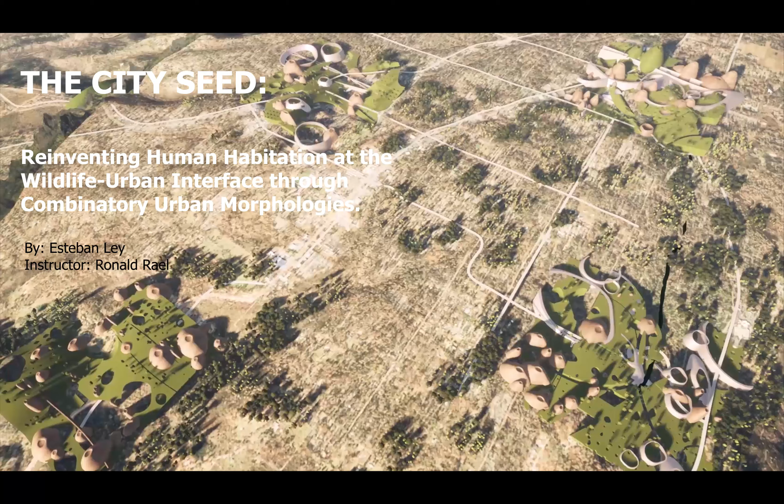The City Seed: Reinventing Human Habitation at the Wildlife-Urban Interface through Combinatory Urban Morphologies. A project by Esteban Ley under the instruction of Ronald Rael.

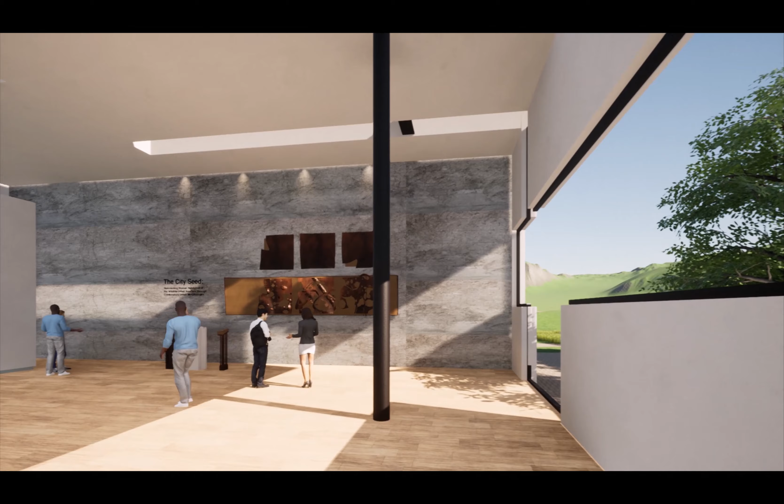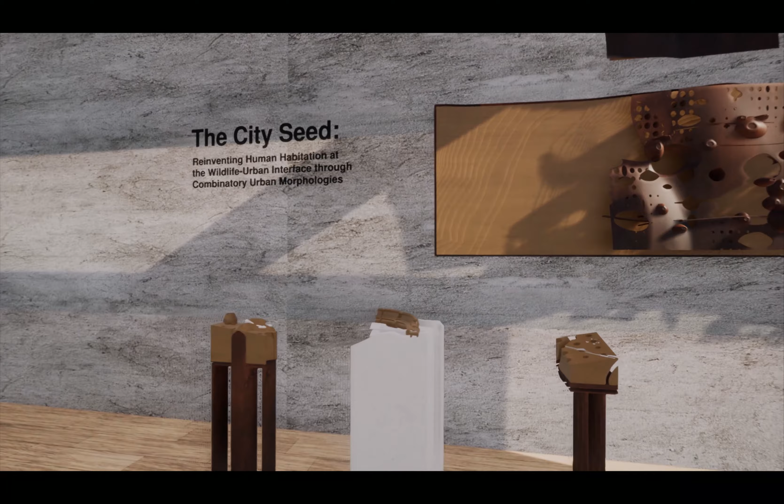The City Seed project is a speculative proposal for the redevelopment of Paradise, California, and the envisioning of a new paradigm for human habitation at the wildland-urban interface. The project's premise is to establish economic and fire resiliency in Paradise, to provide fire-resistant shelter post-fire disaster, and to dramatically re-envision urban morphology and materiality.

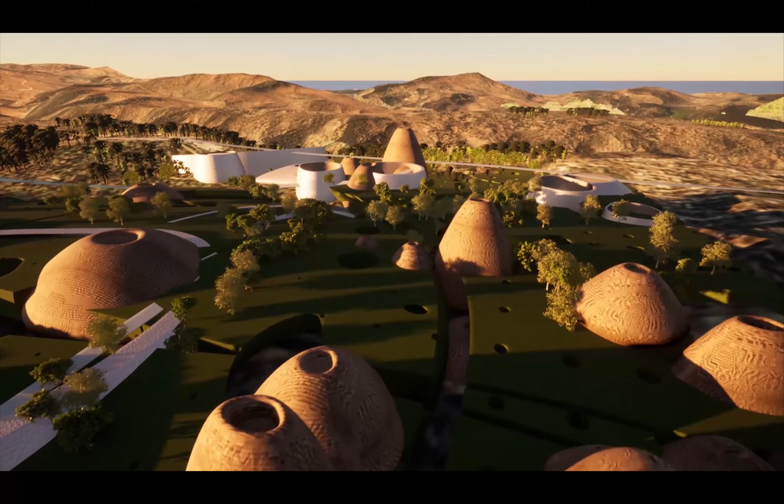With the threat of fire disaster growing year by year in Northern California, it is critical that fire-resistant materials and urban planning be utilized to minimize the burning of our built environment and to build stronger, more resilient communities.

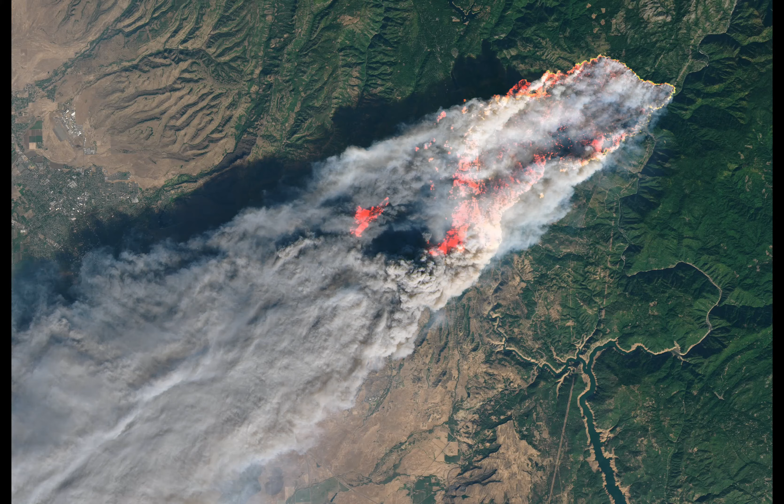In 2018, Paradise was struck by the Camp Fire, one of the deadliest forest fires in California history, which led to a tremendous loss of life. Thousands of homes and commercial structures were destroyed due to the fire, leading to a huge exodus from Paradise in the aftermath.

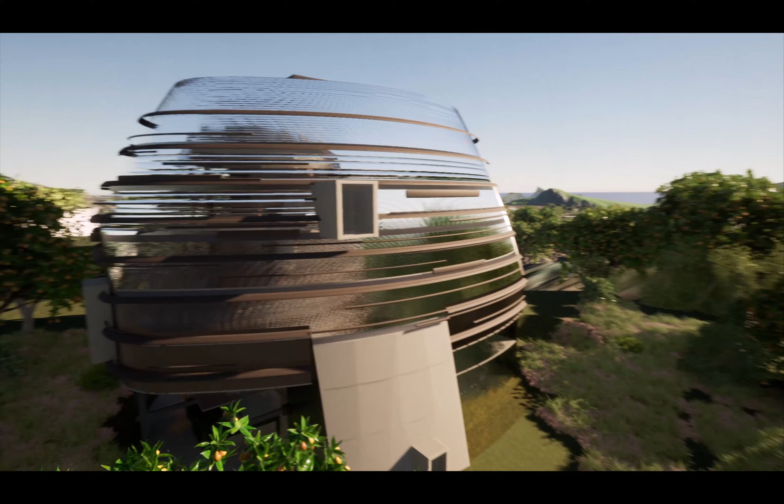The City Seed project includes the design of several buildings situated in a new master plan for Paradise. The plan will phase in the construction of 4 multi-use communities, which will provide Paradise with fire-resistant homes and public structures.

The central concept of the City Seed project is taken from the heart of the problem of wildfires, and from the beginning of any forest, the seed. As if planting the seed for the growth of a new forest city, this project looks into the future of how new homes and shelter can be constructed with fire-resistant materials and fire preventative planning strategies.

The city uses 3D printed earthen construction, terraforming, and troglodyte subterranean dwellings as a code or DNA for future growth. This city will use the refuse of the 2018 Camp Fire as a resource for new construction. The planning of a series of tree farms and managed natural forests in adjacent areas of the burnt city will provide future building materials and could one day become a future site for earthen construction.

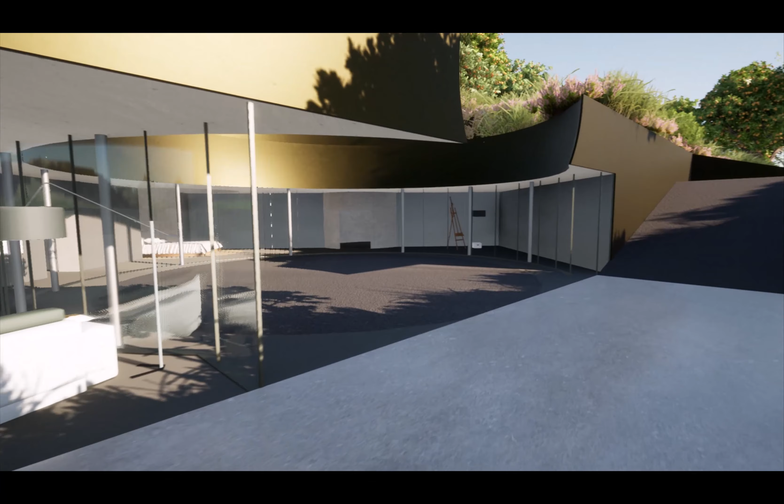Increased density of residential, commercial, civic, and recreational functions minimizes the amount of dispersed rural dwellings, which often contribute to bad forest ecology and risk of fire damage.

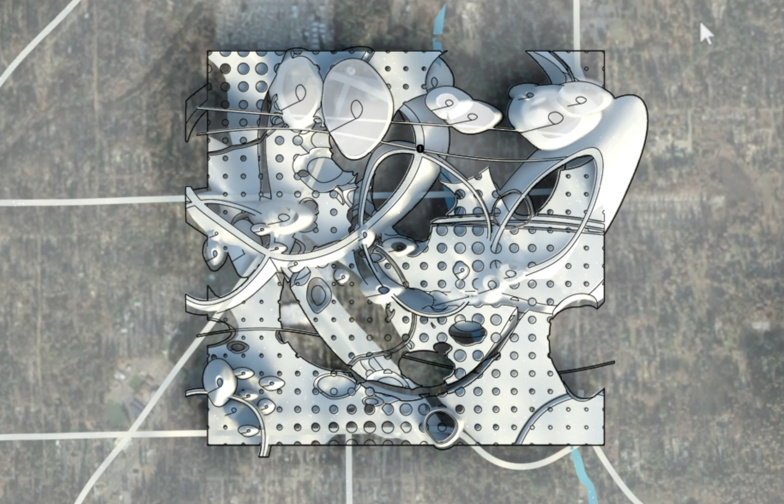While the City Seed project is primarily new construction, a complex palimpsest of new and old is produced by preserving major road networks and large portions of central Paradise.

The primary fire-resistant measures of the city lie in its excavation of earth and subterranean spaces. The primary residential component of the project is its grid of homes dispersed across the site in the form of subterranean courtyard dwellings. Their central courtyards act as a central circulation space and give residents the ability to take shelter under the earth in case of fire.

As another key fire-resistant measure, the combinatory form provides space for new water reservoirs, which have a dual function as park amenities and as water storage for use in putting out fires.

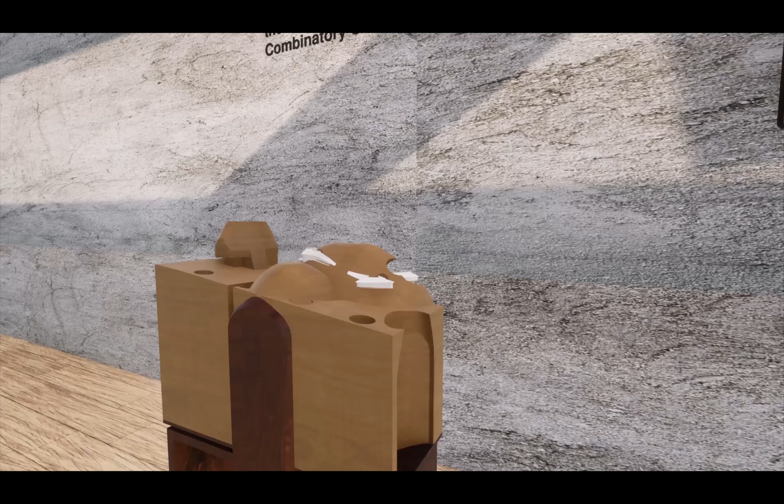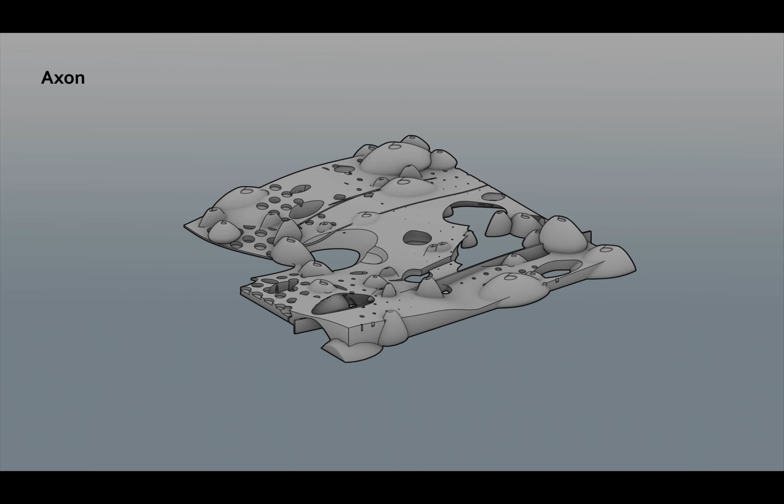The project's combinatory formal strategy is explored through various architectural models at several scales and produces a multiplicity of microclimates and spatial conditions throughout the city. In the generation of these forms, a complex aggregation of various prototypes is achieved through parametric randomization of rotation, scale, and frequency. A rich underlying system is produced by the Boolean relationship between these objects to each other and to the origin surface or field condition.

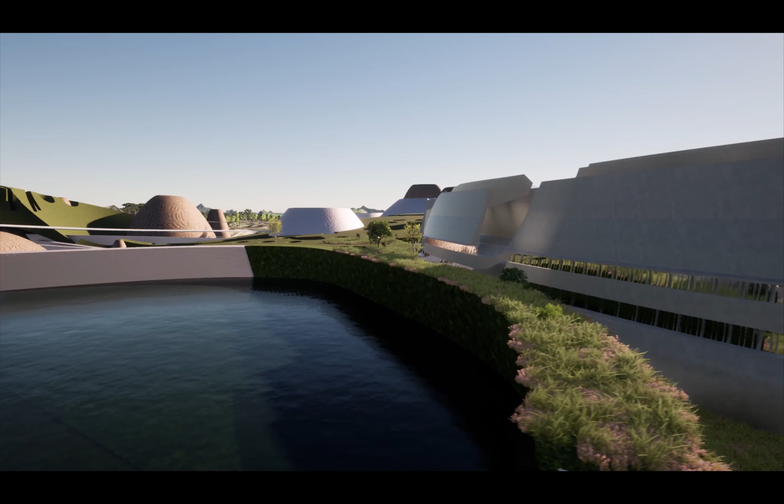The introduction of a variety of formal prototypes also allows for the negotiation and incorporation of water reservoirs, public recreation spaces, and tree farms into the urban landscape. The project critically reconsiders the ground plane as a hybrid of synthetic and natural landscapes.

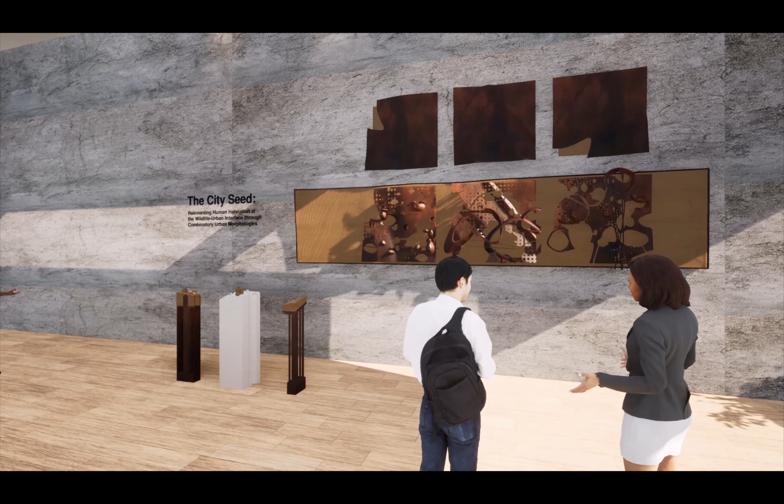The courtyard prototype is the primary residential component of the development. The network of single-family homes creates an interconnected field across the site. Each home benefits from passive heating and cooling thanks to the temperature of the earth.

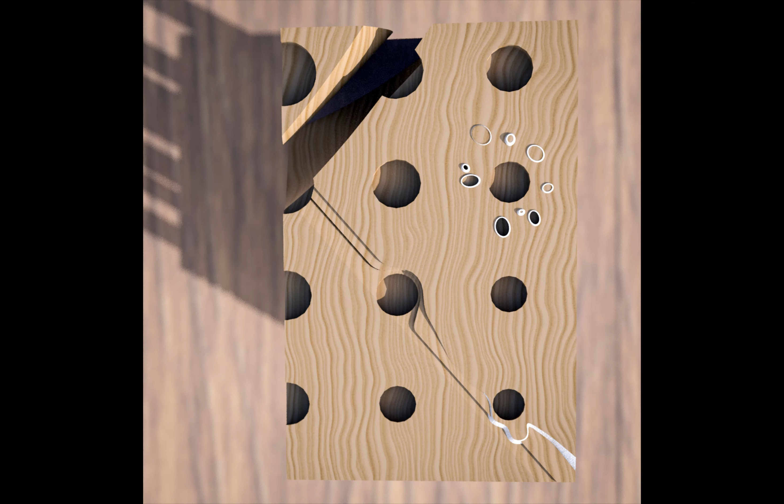Terracing and circulation down to the courtyard home maximizes southern exposure and increases availability to natural light. Each home is radially planned around a central garden and courtyard. The spaces deeper in the earth act as shelters from fire and receive natural light from skylights.

These subterranean spaces would be constructed with 3D printed earth, concrete, and small diameter timber framing. The excavated earth gathered from each home would be saved as a resource for constructing other buildings on the site.

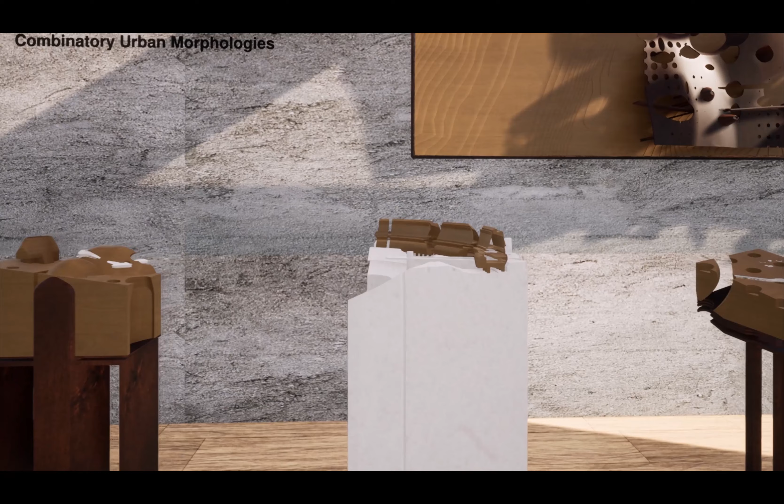The final prototype explored by this project is the ring prototype, which can be seen across the site at the location of several water reservoirs. Water is contained by this massive outer concrete ring.

Some of these small lakes will be available for public use as amenities and parks, while others will be reserved for firefighting purposes. The ring typology seen in this physical model shows how these forms can be segmented and constructed as buildings. These extruded building forms function as educational or medical facilities and are connected to other commercial and residential areas through public metro systems.

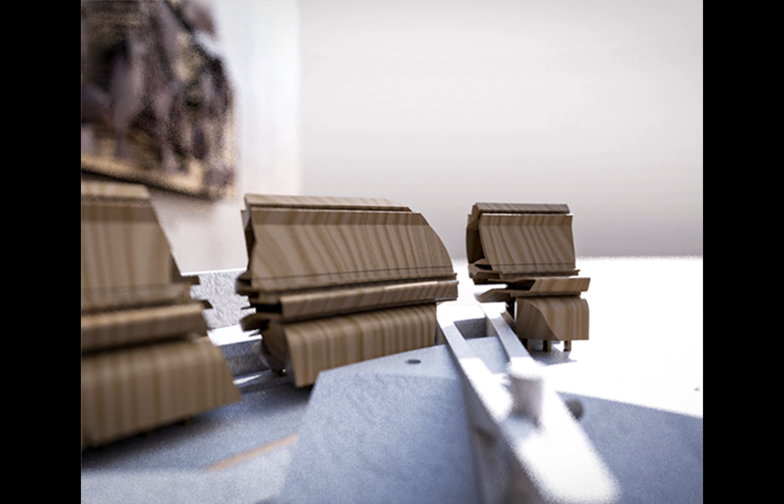The slanted floor plates of this building accommodate auditoriums and lecture halls. The primary horizontal circulation at the core of the building connects several building chunks as sky bridges, while the vertical circulation is achieved through the addition of a series of rectilinear cores.

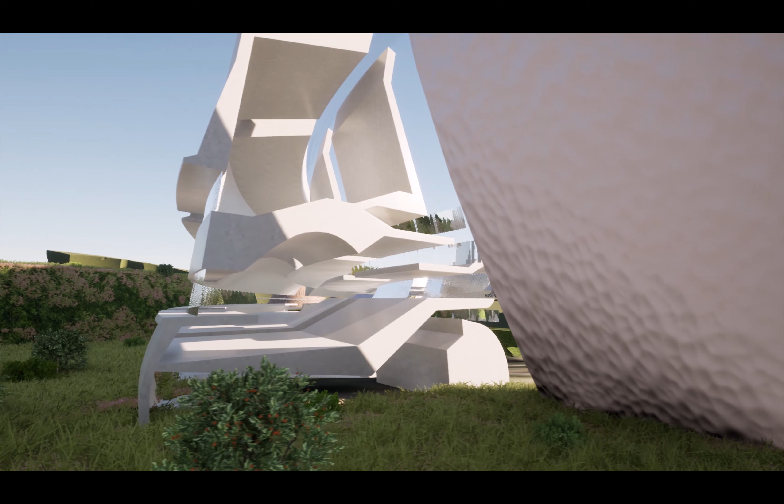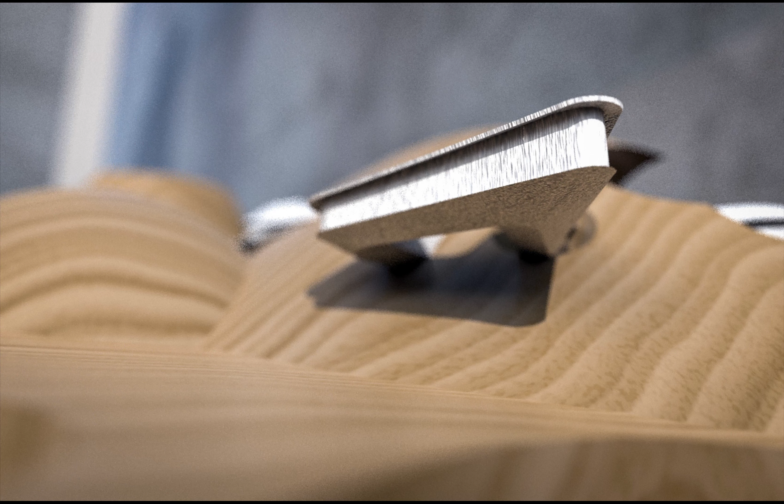Seen in this physical model are the additive mound building types aggregated across the site. These building types take on a variety of construction techniques and sectional properties. These prototypes are typically planned as multifunctional buildings across the site, housing commercial, civic, and multifamily residential functions.

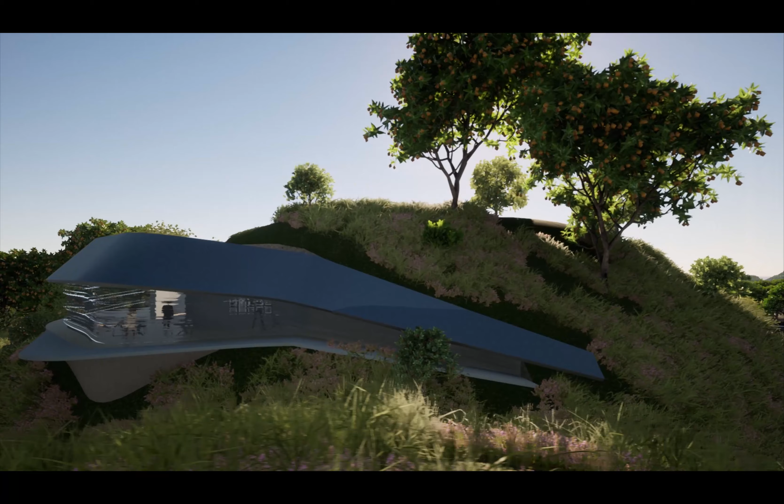The mound form is designed as a green hill with subterranean troglodyte spaces on the interior. Its primary vertical circulation is located at its core, with horizontal circulation weaving in and out of the hill at its circumference. Large atriums and skylights allow light into the interior of the mound. By maximizing the earthen exterior and minimizing exterior facades, this building becomes protected from potential fires.

The third and final construction type would be a free-plan tower with a non-structural glass and ceramic skin. Its primary structure is a small diameter timber structural frame and a vertical core. The ceramic facade is sourced from local clay and provides the building with shading and fire protection as a fire-resistant and anti-corrosive material.